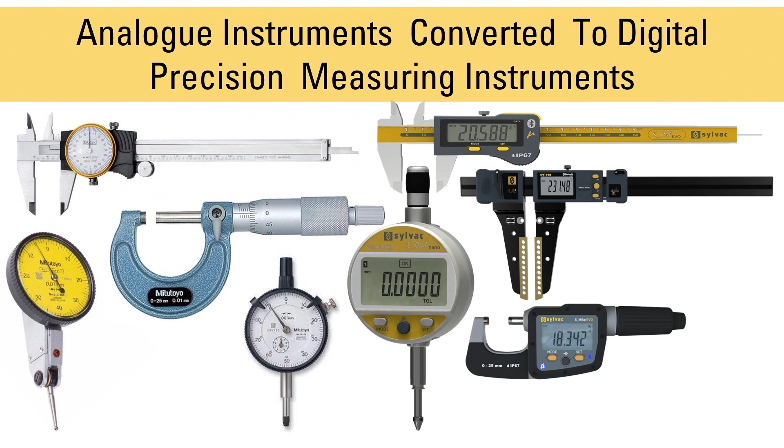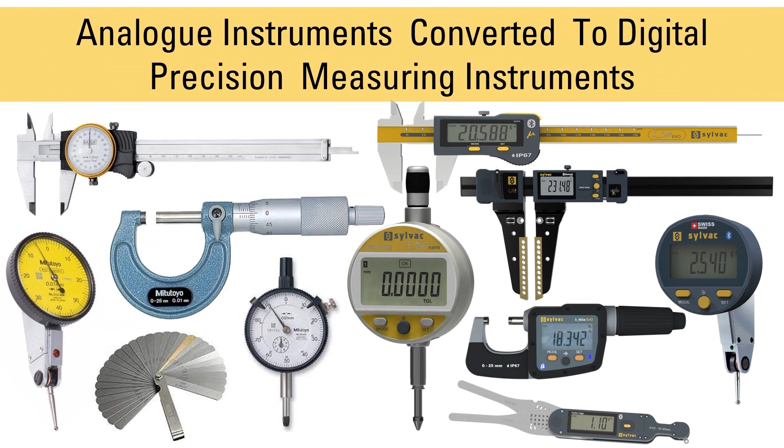Of course there are different kinds of analog instruments and different kinds of digital instruments. You would have definitely used one of these in your industry if you are into manufacturing.

Advantages of digitalization: easy to measure and reduce inspection time. Today, time is money. In any business, it's always about how much time you utilize to complete the product. If in your 8-hour shift you are making 100 components, but you are able to make 120 components, those extra 20 components are where your profitability lies.

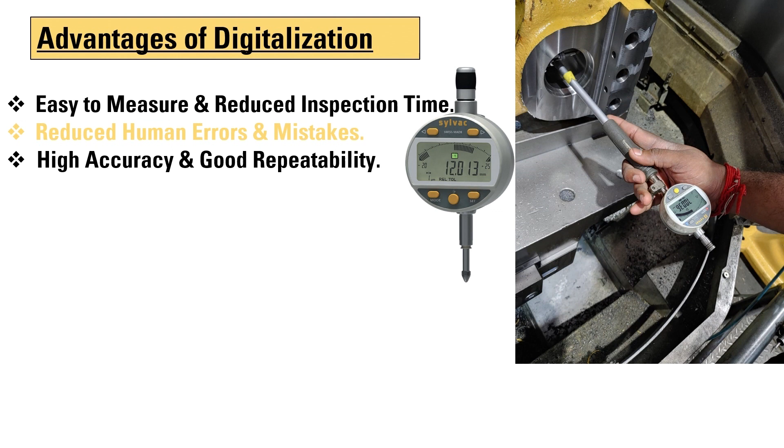Because rather than measuring by a human, it now goes into digital measuring. So automatically the accuracy level improves because there is no manual intervention between a human and a paper, or from paper to the computer.

And it easily interfaces with the PC for data collection. You can automatically integrate it with a PC. I'll show you how it is.

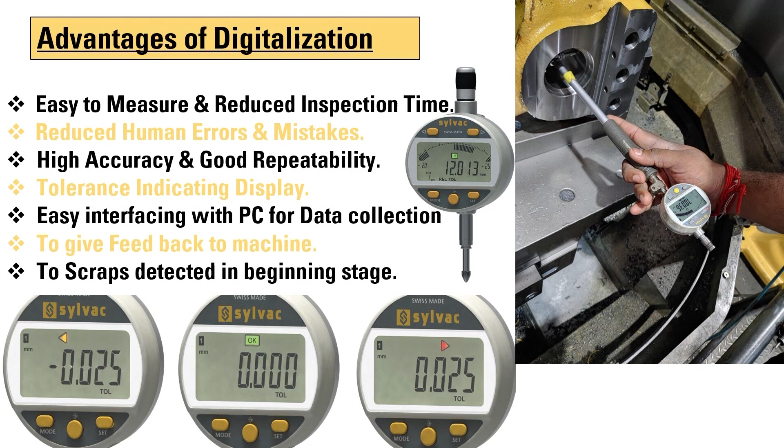And now it can also give feedback and enable scrap reduction at the beginning stage. Suppose we are making a component and machining it in the machine shop—immediately, at the very first measurement, it can catch hold if the component is out of tolerance. It can give the signal to the machine, as well as to the operator, the QC lineman inspector, and the GM of quality. They may be in different locations, but everything is kind of seamlessly connected—so if there's a mistake in one place, it immediately gets highlighted to everybody in the system.

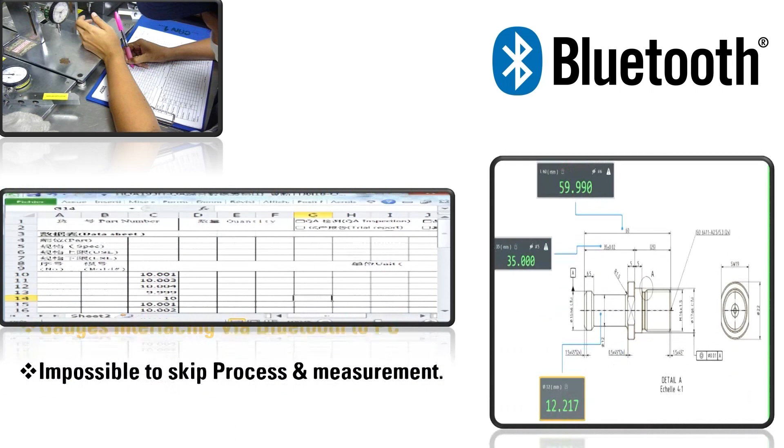So again, I think this TV is visible—okay, so you are seeing a typical Excel spreadsheet, and to the right you are seeing a component.

The beauty here is through Bluetooth technology, and Bluetooth is not new—it is something we have been using for a long time. Long ago we used our cell phones, then we had cordless devices with wires that everyone kept in their pocket to talk. Then came Bluetooth—now everyone has a Bluetooth device in their ear through which they talk. So in consumer products we are all using Bluetooth technology, but in our own industries we are missing out on using it, and it's very simple.

That's exactly what all these instruments are doing.

It has a Bluetooth enabled transmitter which transmits this data when you measure it to the PC. On the right side there's a screen component, and it tells you the dimensions. All those green things are the measured dimensions, and it goes to the PC, and then from there you can get it to your Excel reports automatically. So this is how it kind of seamlessly integrates. When you measure, immediately the data gets transmitted via Bluetooth and it shows up in the computer.

You'll have a drawing, and on that drawing there will be some critical measurements. Against this critical measurement, what you have achieved and whether it is okay or not - if it is okay, it shows green. If it is not okay, it shows red.

So likewise, you can centralize the entire measuring operations in your company. Whether you have one machine or two machines, it doesn't matter. You can centralize all this data collection and checks and balances, and it is impossible to skip.

Most of the time, rejections happen - when you go back and check, the operator says 'sir, I forgot, I missed measuring this inspection.' There'll be 10 stages in the QAP, or maybe 15 stages, to complete a component. Every stage is critical for the quality. Sometimes a measurement gets skipped - it's human error. You, me, everybody will do it.

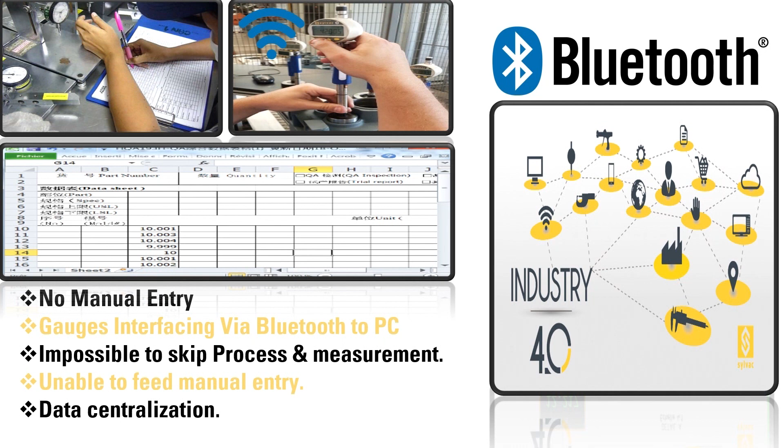But the beauty of the system is, when you integrate the computer to the instrument, the inspection report won't complete unless you complete all 10 stages. Only after you capture all 10 stages of inspection on the computer will it say the inspection is completed, and the paper gets digitally generated. Otherwise you will not be able to complete the inspection report. So ultimately you are moving the manual process of inspection to a computer controlled process of inspection.

This is very, very important. Most of the time we miss taking a measurement, and that's where the problem gets created.

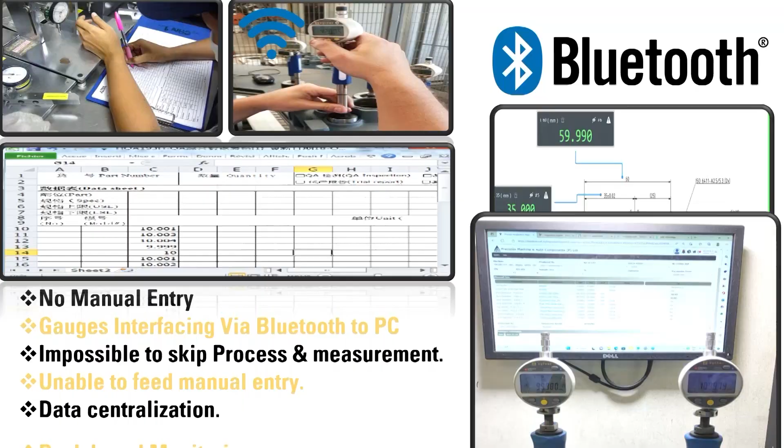So for example, on the screen now there is a component we are measuring, and behind it with the dial gauge, there is a monitor which is capturing the data. So there is absolutely no cable or anything - the entire thing is transmitted through Bluetooth.

And of course, it is a green initiative. We all talk about circular economy, reducing waste, and waste reduction happens in every part of our process, including the consumables we use. Paper is one of the largest consumables we use.

So there is absolutely no paper, no pad. Because when you go to the shop floor, your inspector will be having a pad, a pencil, and an instrument, and he'll be trying to figure out how to manage it all. So all of this is eliminated - there's no pads, no papers, no pen or pencil. Just you, your instrument, and the IoT, pretty much.

So ultimately there are no manual inspection reports being generated. Whatever report is electronically generated can be stored as a PDF file. You can digitally sign it and supply it with the component - it doesn't need to be printed.

It can be emailed to the customer, or you can even go one step ahead and give your customer access to this, so the customer gets to see immediately once the product is done, what the inspection report is.

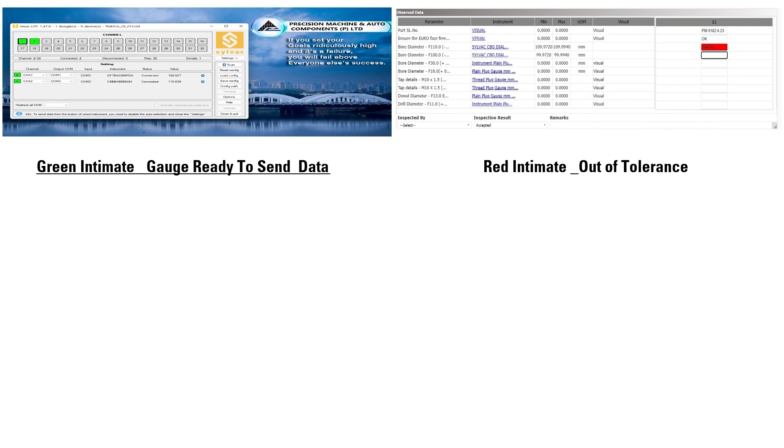And here's another Excel example I've captured. This is all live data captured from our company, and there is one particular measurement that has gone red. Nobody is manually changing it to red - automatically, if it is out of tolerance, it becomes red.

And the other best thing is this is something very useful. What we do is for calibration we put a sticker on every instrument, right? Everybody uses ISO system, and you calibrate your instruments. You put a sticker every time. But the sticker gets torn after some days, gets dirty, oily, so you forget to calibrate the instrument. And what happens if you use a wrong instrument which is not calibrated? You'll give a wrong measurement, and obviously your part will be rejected.

So automatically in the IoT, this small Bluetooth enabled device you use with your vernier caliper or bore gauge, screw gauge, the computer will tell you when it needs to be calibrated. What happens if you don't calibrate? It will shut off. The instrument cannot be used because it will not turn on. Automatically it sends a report to the QC manager saying these 10 instruments are due for calibration, and it will not turn on. So this instrument gets disabled and will not be available for usage. That's the biggest advantage.

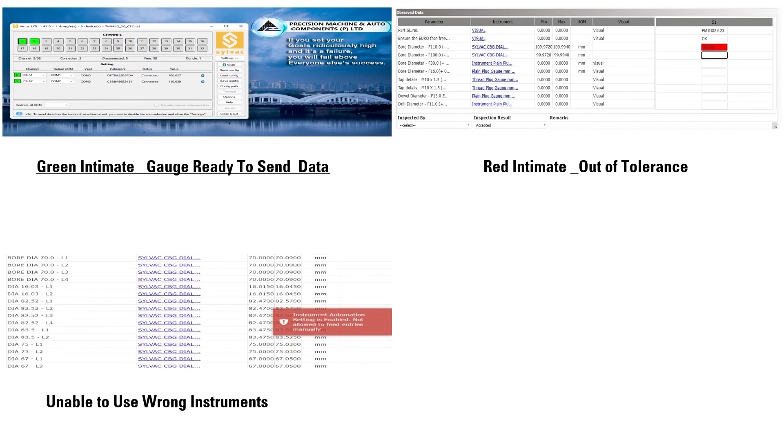So when somebody comes for audit, qualifying your shop, the first question they'll ask is how do you calibrate your instrument. You tell them, sir, we don't do manual calibrations. Of course calibration is done, but how you control and monitor the calibrations is exactly like this. They'll be super impressed, trust me.

So, unable to use wrong instruments, that's what I said. There's no way for you to use the wrong instrument because the system will not allow you to use wrong instruments.

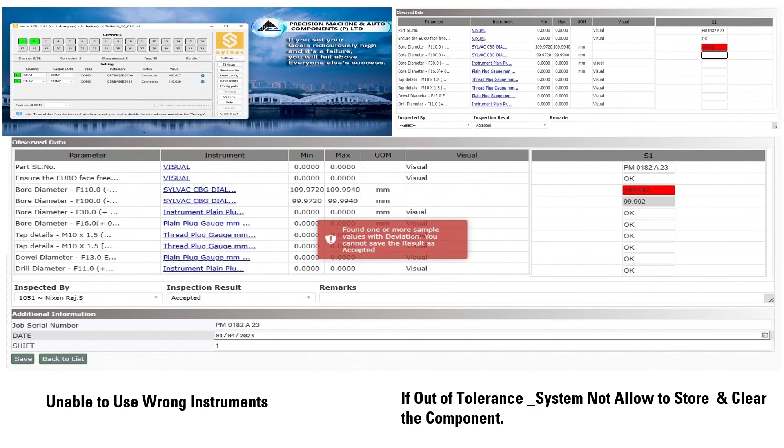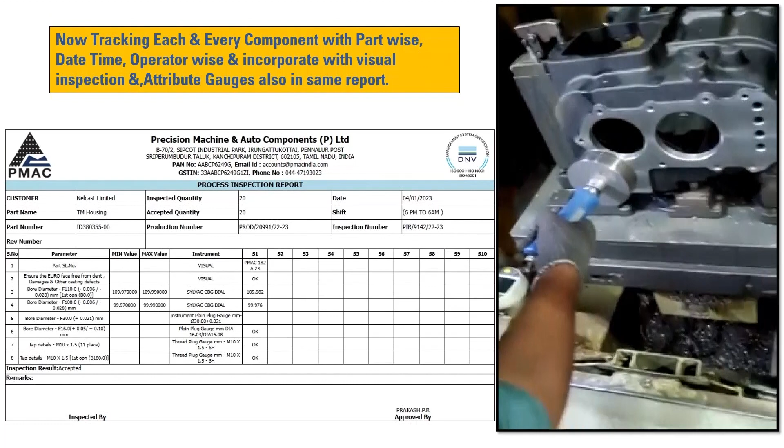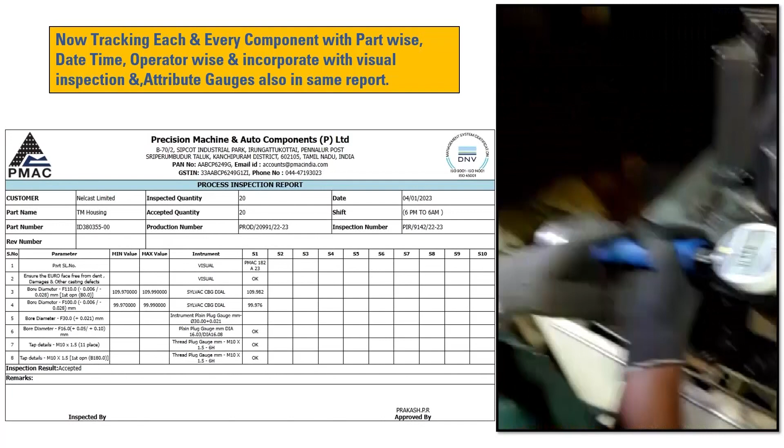So simple. We have about 20 CNC machines. Remember, 20 CNC machines, every single operator measuring the data, and then how much data we collect. Everything is now - I used to have 5 line inspectors, shop QC inspectors, 5 people there. Now I have replaced those 5 with one guy in a computer room. He has a computer and he sees all this data coming into the reports. So from 5 operators, I've gone to 1 operator, and that guy is also very happy because now he is able to see a better visual representation of what everybody is doing.

And automatically the error on the report can also tell you which operator and which machine. So automatically he calls on the wireless and says machine number 1, operator Velmurugan, please hold - like that he can say. So up to that extent he can have a centralized control.

How much time do I have? 10 minutes. Okay, yeah.

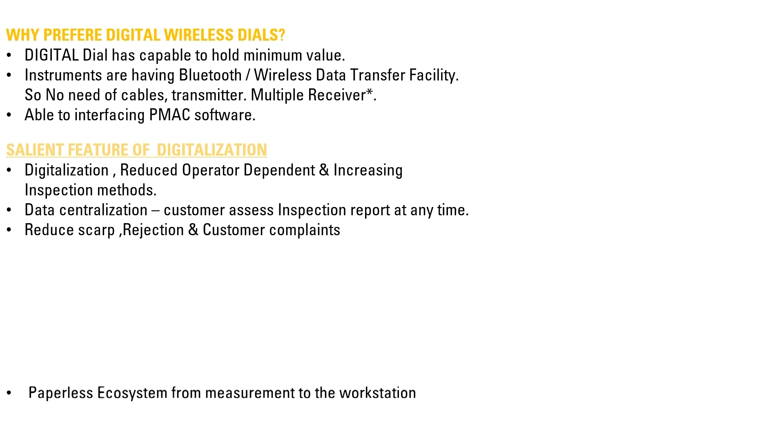So these are all the advantages. I'm here for the rest of the day, including my partners. Because of time limitations, we have to hurry up. But these are all the different advantages we have. This again, for dial gauge, for bore measurement.

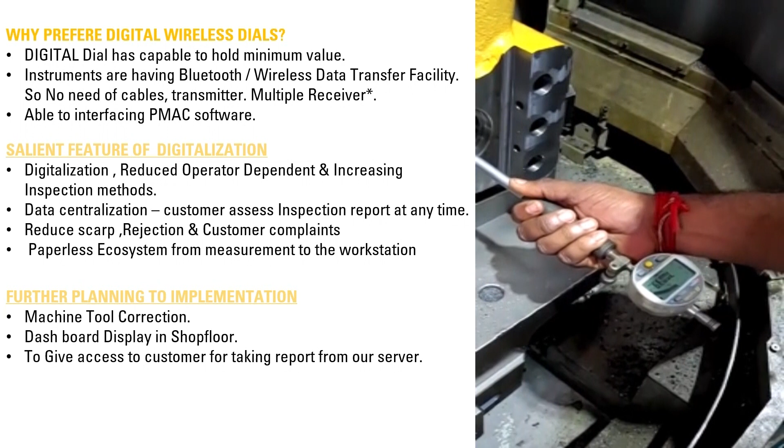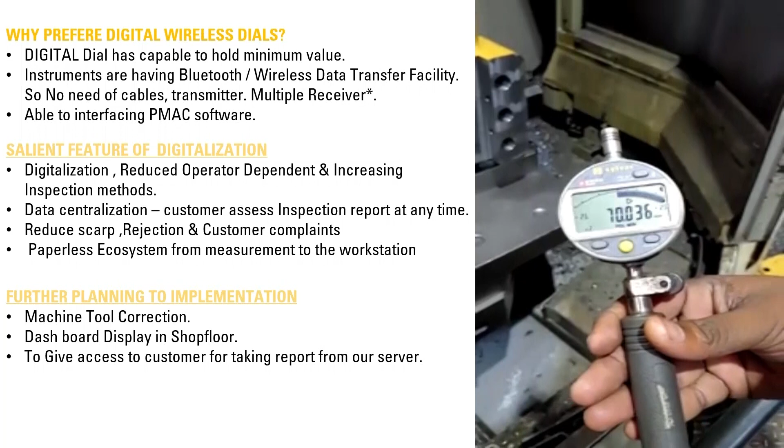So you don't need to turn around to find the given spot. Automatically, the remote tells you. You take it out and then the data gets transmitted. So all these are benefits.

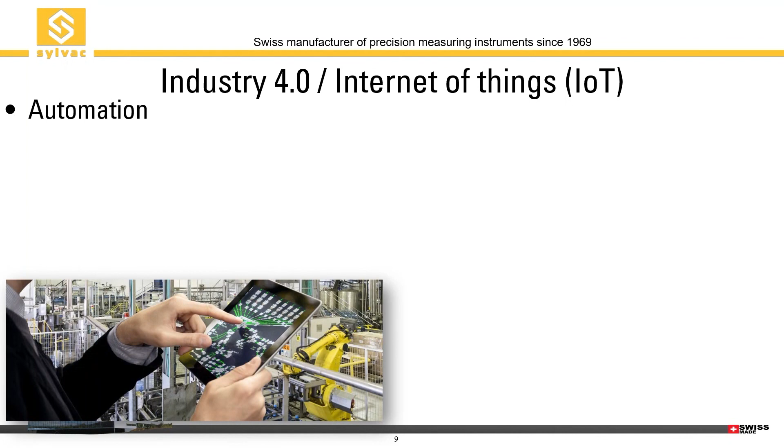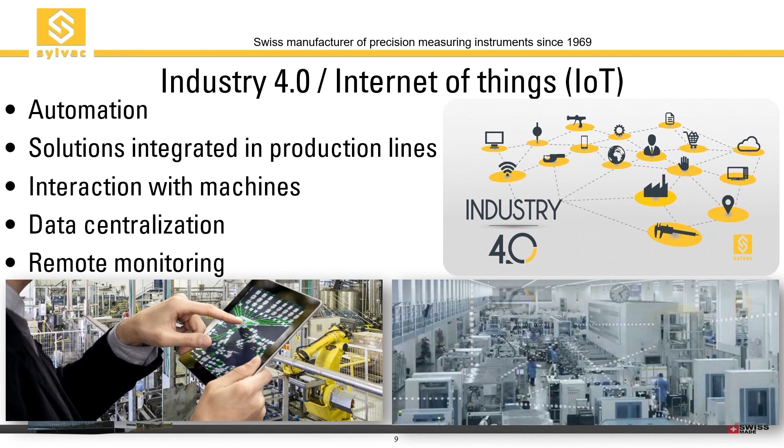Everybody is talking now about Industry 4.0, like Internet of Things. What Internet of Things did is automation solution integrated to the production lines, interactions with your machines, as well as data centralization to collect all the data in one centralized place, and remote monitoring. So the person who is sitting in any part of the place can access the factory via the Internet of Things.

So what are the wireless special features? Is this really wireless, with the connecting outside transmitter and receiver? No.

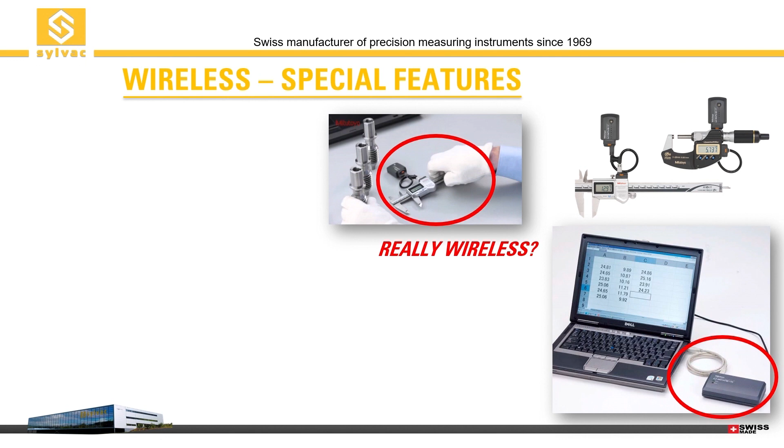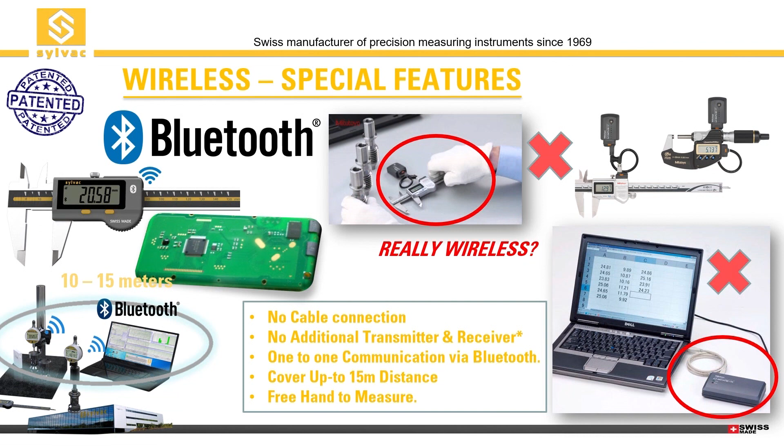We have Bluetooth instruments which need no cable connections, no additional transmitters and receivers required for our gauges. The Bluetooth chip is fitted inside the instruments, which is really helpful and very easy to use for the operator. There is one-to-one communication via Bluetooth, and the range of the Bluetooth covers up to 15-meter radial distance. It's very freehand to take a measurement from the instruments and send the data to your computer. It's patented for the Sylvac range of gauges for Bluetooth transmission.

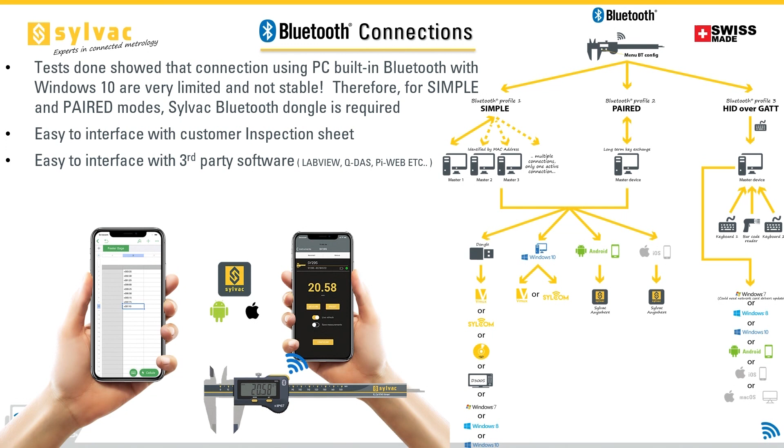We provide free software for the instruments to collect the data. With HID, you directly press and get the data in your computer, as well as through the Play Store software. For single instruments, we provide software which is free of cost.

The free mobile app is also available in the Play Store with tolerance mode, date and time. The mediator software is required for sending the data to third-party software like QDAS, PiWeb, QC-CALC, and if you want to send the data to Excel.

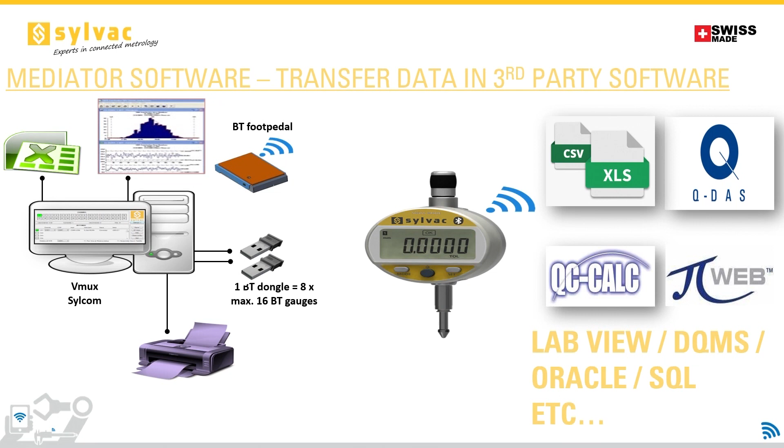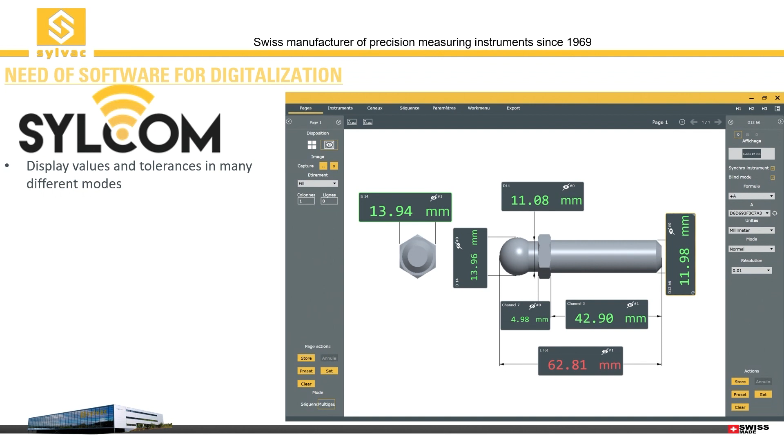So why do we need software for digitalization? We have software for digitalization, which displays the value and the tolerance in many different modes, like OK, not OK, green, CP, CPK value, current runtime chart, control plan.

We can use the barcode. If you have your component in a barcode, just scan it and the program will open.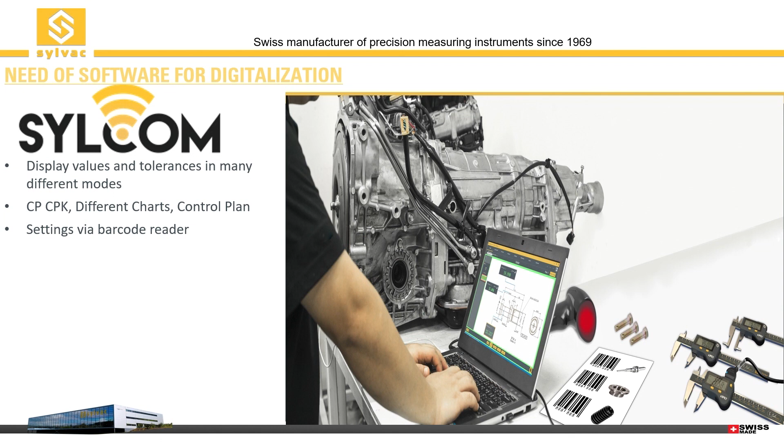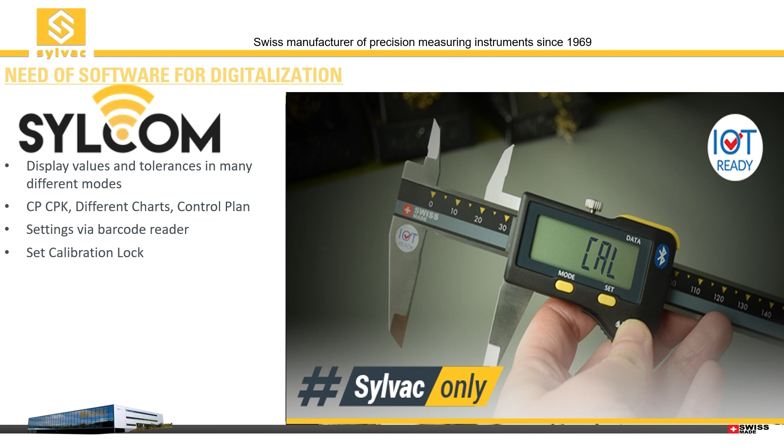As earlier Mr. Bala said, we can lock the instrument for calibration. Once this calibration is over, the instrument cannot measure the values.

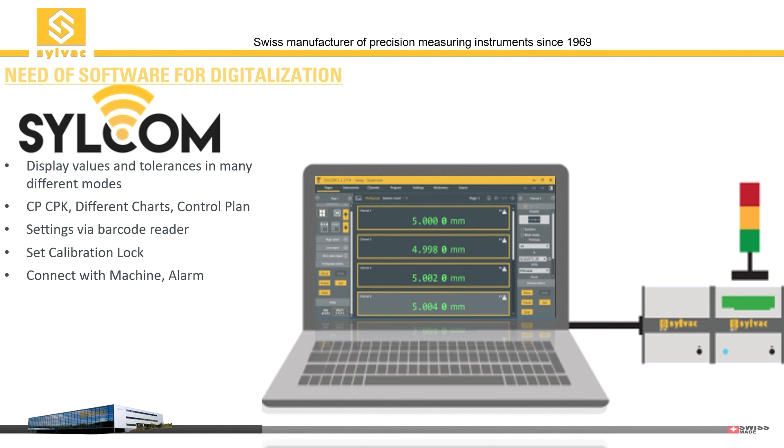Then we can connect with the machines for an alarm, like if you are going out of tolerance, it will send a command to the computer as well as some light indications. We can use up to 40 Bluetooth instruments. We can use multiple air gauging with the software for analyzing the data.

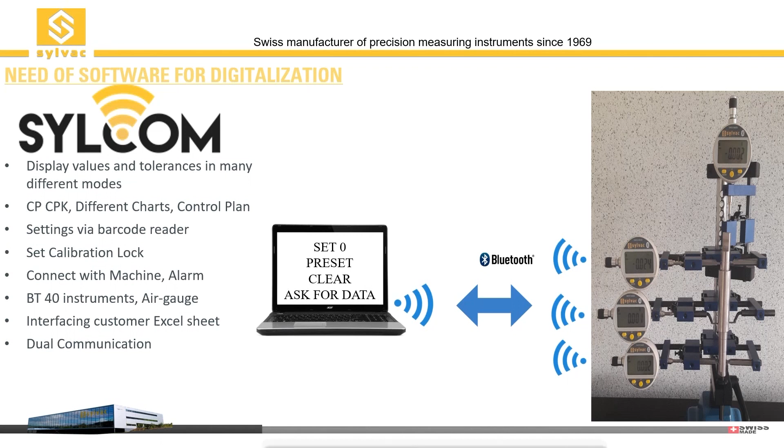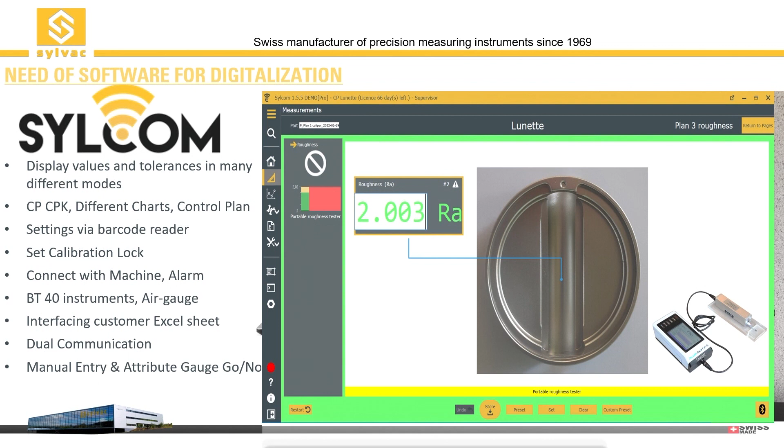If you have your existing Excel sheet, data can be directly dumped onto the Excel sheet by pressing the foot switch. We have the unique USP of the instruments, which is two-way communication - via computer we can also send data to the dial gauges as well as the instruments. We even have software with the possibility of attribute gauges, go/no-go, which can be manually entered in the software to generate a single report.

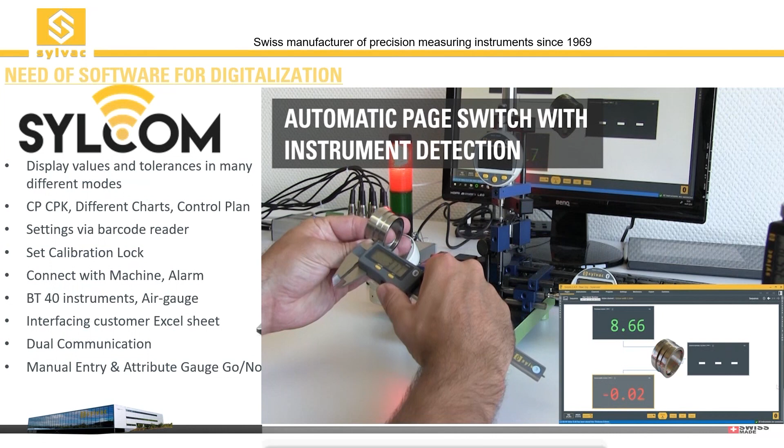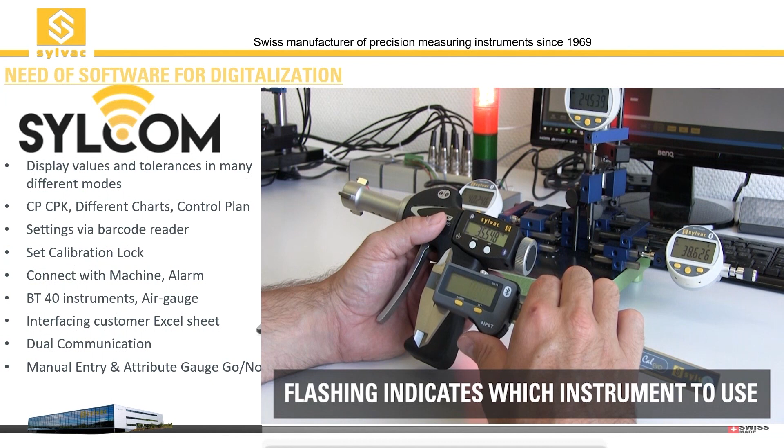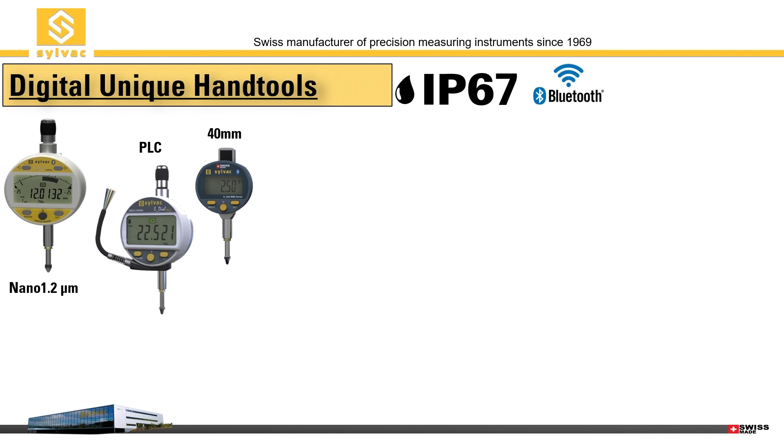So why digital? What we have in digital instruments for the production lines, like dial gauges - it's a 0.1 micron dial gauge, PLC dial gauge for communication with the machines. The small indicators with Bluetooth for special purpose machines.

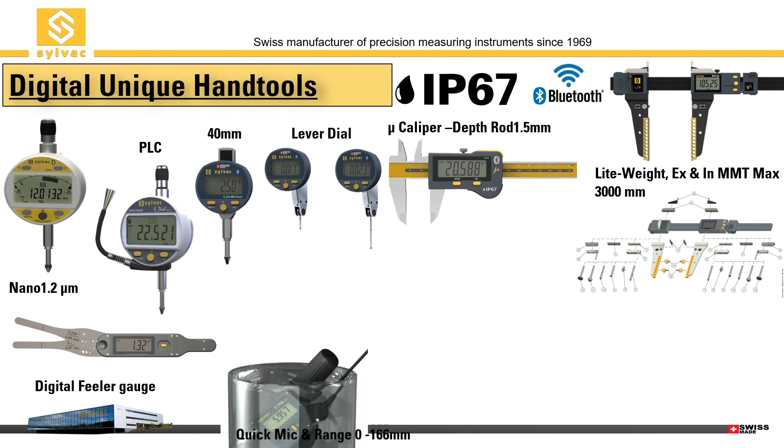Lever indicators, micron caliper - that is an ultralight caliper up to 3 meters, and the 3 meter version weighs 3 kg. Digital feeler gauge, it is a patented instrument. Micrometers, height gauges - that is a digital height gauge with motorized input. And all these instruments come with Bluetooth.

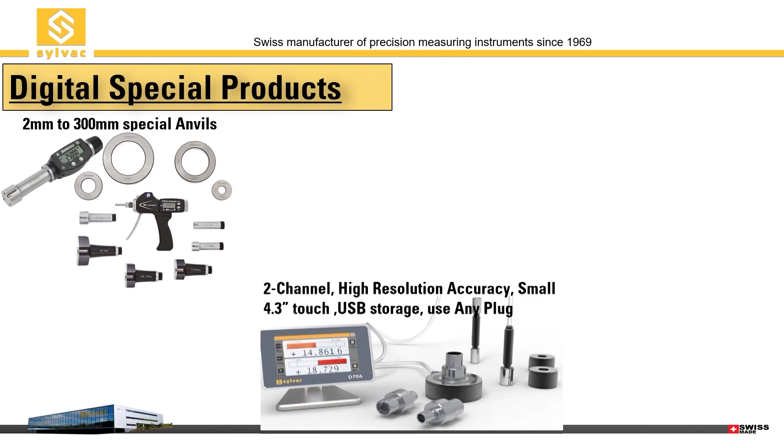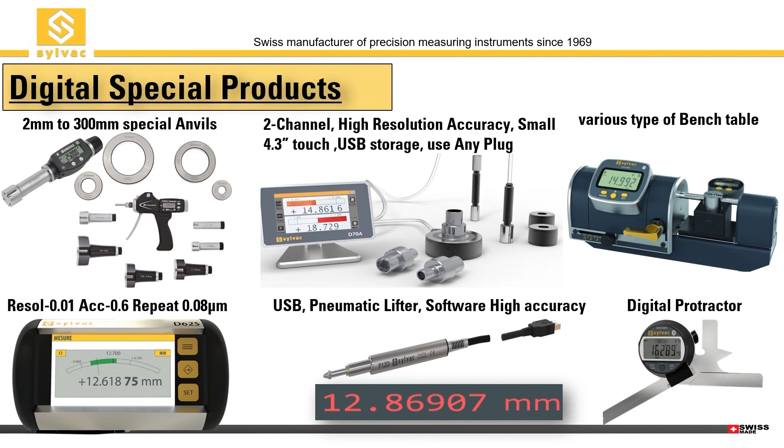We have some internal measurements also with Bluetooth. Some air gauges we connect with the software for Industry 4.0. Some small bench tables, 0.01 micron resolution digital display unit, 0.1 micron digital probes, and some bevel protractors. We also have some capital items for measurement of shaft scanning with different applications.